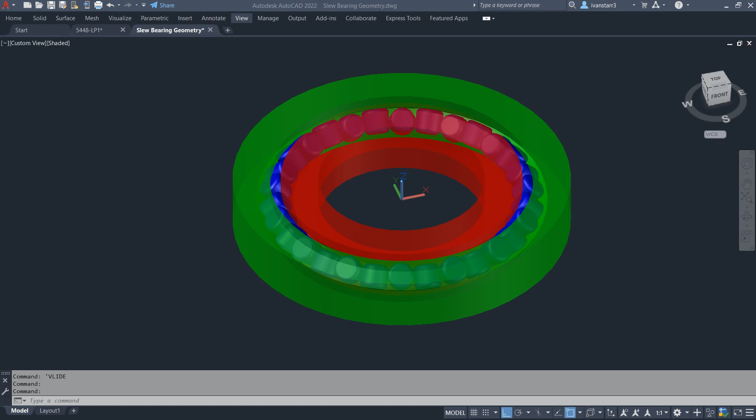Okay, this will be a brief description of slew bearing design in a program I wrote in AutoCAD to design slew bearings, which is a kind of bearing which can take a lot of axial force and a lot of bending moment instead of just a radial force.

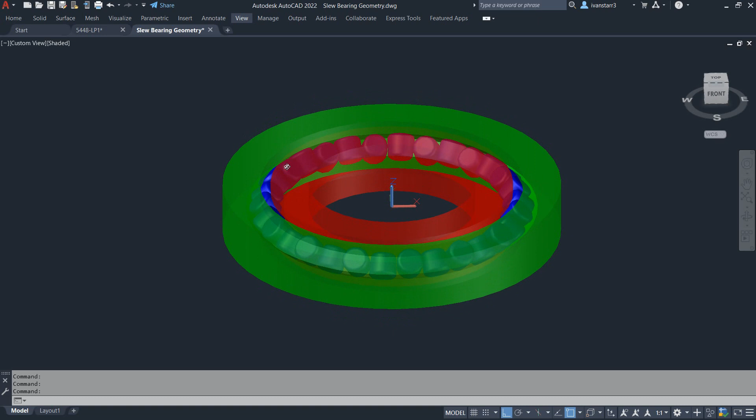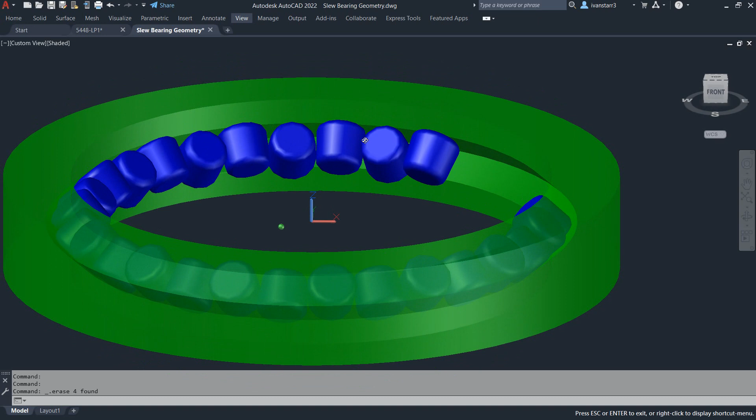And it's because they have these rollers in two V-shaped troughs. For example, if I erase these two things here, you can see that V-shaped trough, and that allows the bearing to support a lot of bending moment and a lot of axial force. And they're used in things like excavators and wind turbines.

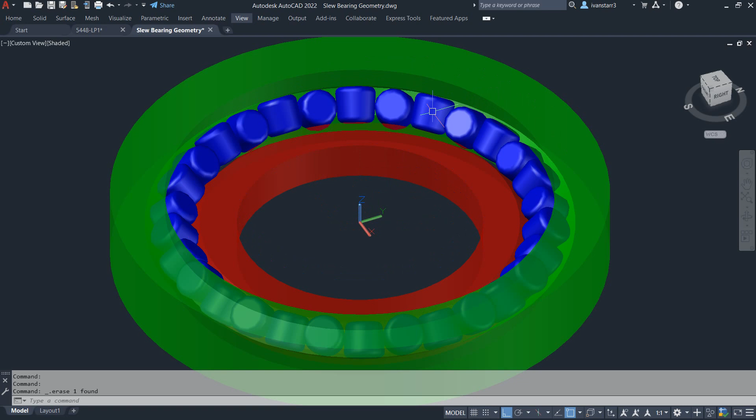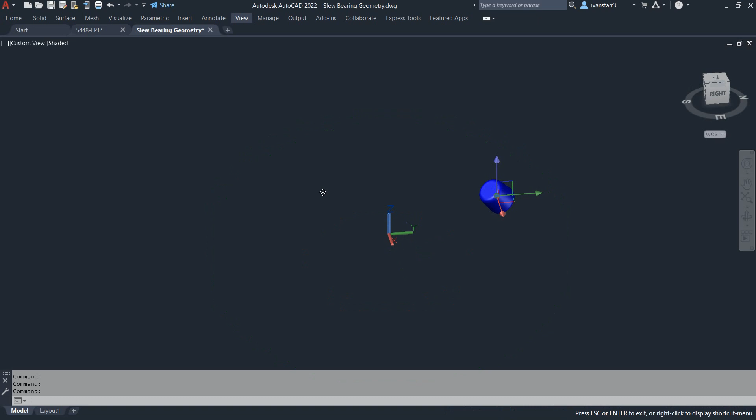And I became interested in them after I saw a video about a guy who was designing them for 3D printers. And he was doing it with cylindrical rollers, and it was only at the end he said, well, they should be cones. And so I said, well, damn, I'm going to design it with cones, because it was obvious that you shouldn't use cylinders. So I went about to write a program.

Well, first I designed my own slew bearing manually. I was able to do it, and then I wrote a program to do it. So the first thing I did is that I did it.

Whoa, hello, where'd everybody go? Oh, hold on, I want to have them.

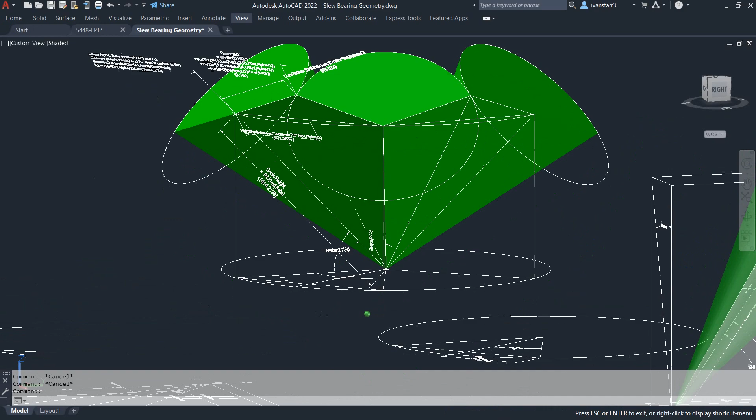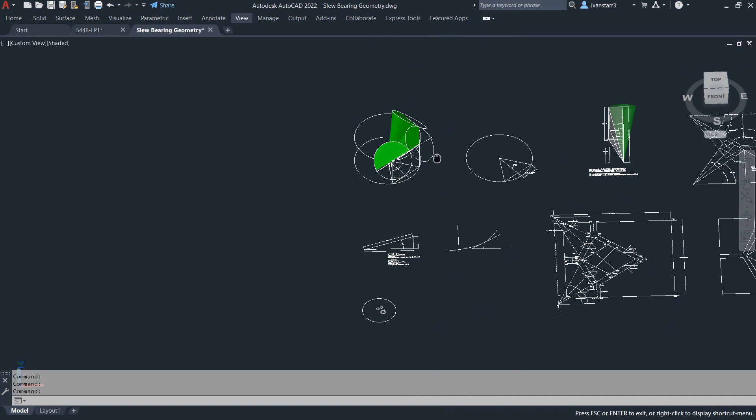First thing I did is I made a model of the bearing, of how it actually works, and they're cones because all the cones have to meet right at the center of the bearing. Well, at the bottom, along the radial axis of the bearing. And in order to get a slew bearing that will resist force in both directions, you have to have cones which point in both directions, as seen in here.

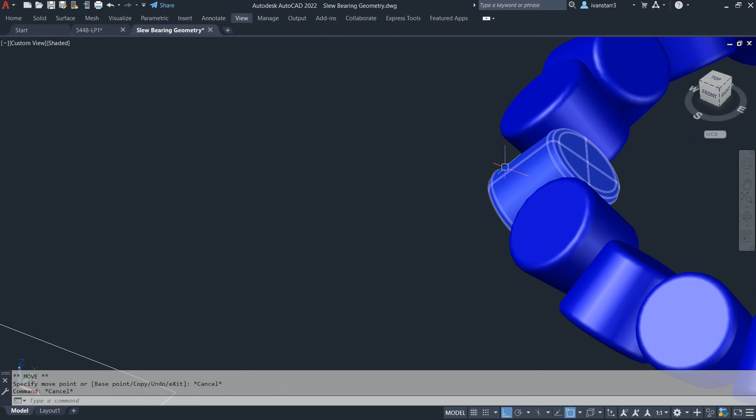So some of them will roll when there's a bending moment or a radial force in one direction, and then the other ones will work when there's a bending moment or a radial force in the other direction. So I realized that I was making things a little too complicated. I could actually describe everything with this here.

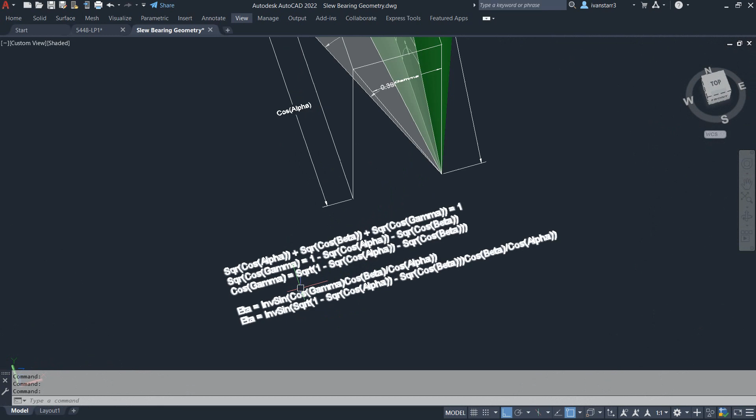And what I learned from this are the relations between these three angles. Alpha is determined solely by the number of rollers that you have in the bearing. And then there's these other two angles, which are beta, and another one I called eta.

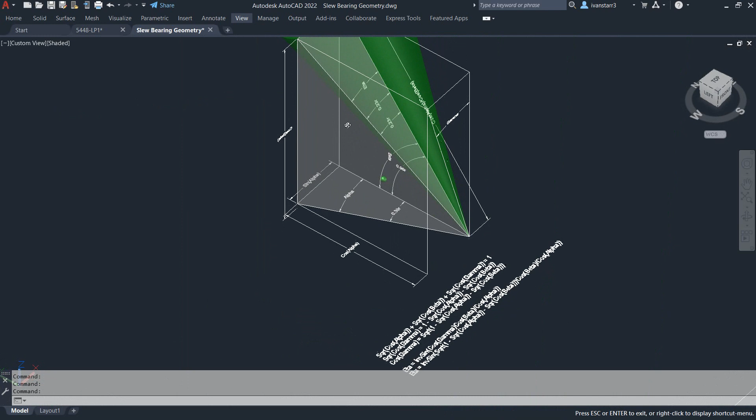And those are actually determined by the fact that the angles have to be correct for both sets of these bearings, one set pointing one way and the other set pointing the other, alternating. They have to line up correctly, and so this describes the geometry to have them lined up correctly.

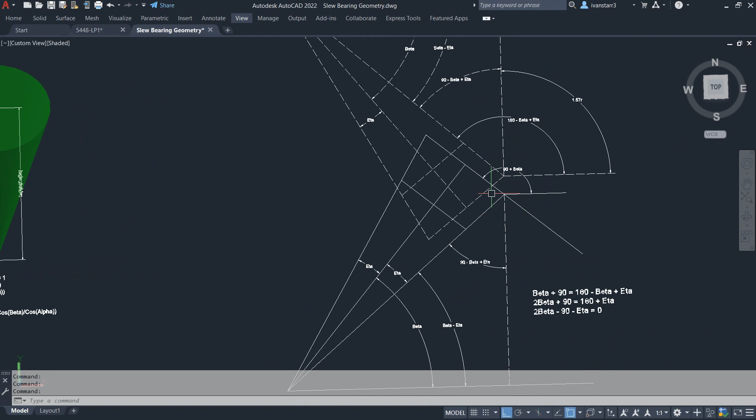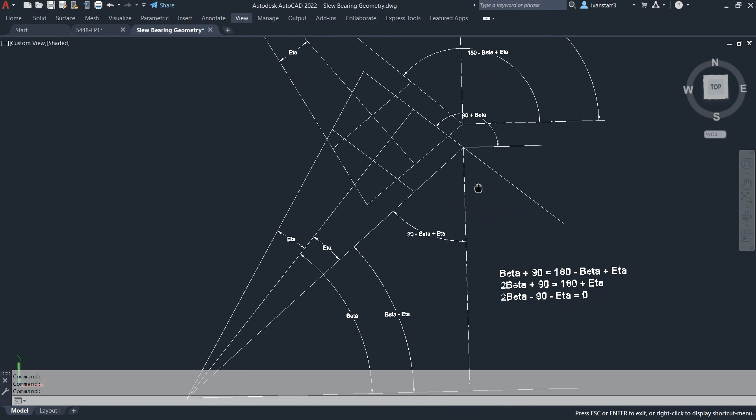And you get to a formula which basically says that beta plus 90 has to equal 180 minus beta plus eta in order for these angles to be equal, which they have to be for both sets of conic bearings to work in the same space. And that's simplified to 2 beta minus 90 minus eta equals 0.

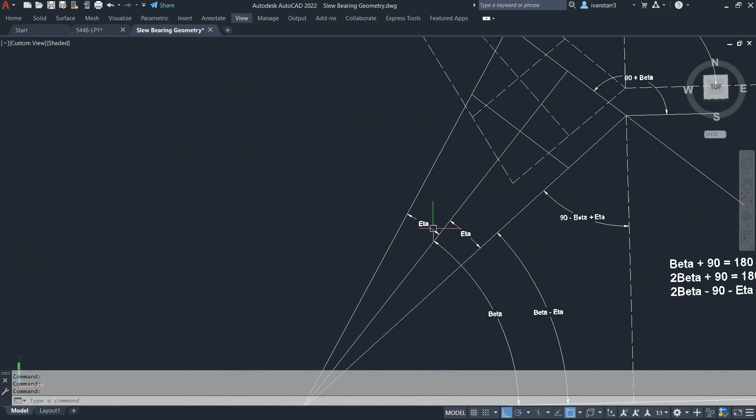But eta is dependent upon beta and alpha. Alpha stays constant because that's determined by the number of bearings. But eta is dependent upon beta, because when the angle beta changes, the angle eta changes as well. So I solved for eta.

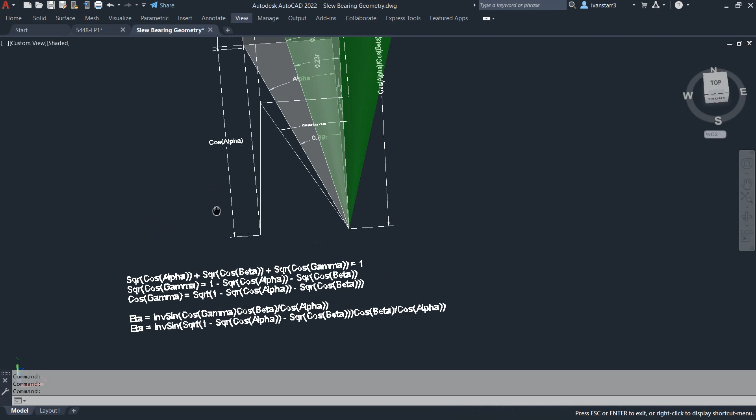Eta can be solved explicitly for alpha and beta. So I take that explicit equation for eta, and I substituted it into this equation, and I got a non-linear equation which I then used in the Newton-Raphson method for root finding, which is the simplest one that you can use, and it works very well if you know approximately where the root is, which we do. And don't worry about that, that's something else.

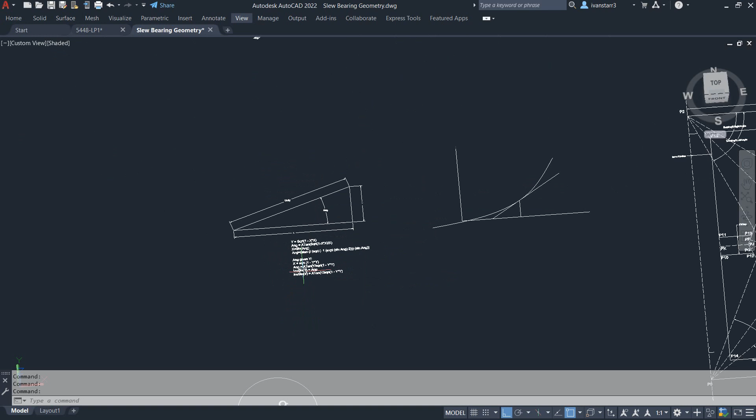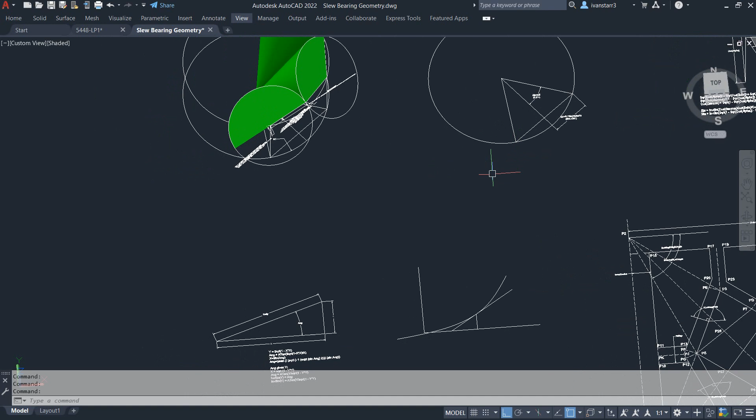In any case, once I have alpha, which is determined by the number of bearings, I can then use these equations here with the Newton-Raphson method in order to find the solution to beta and eta as well.

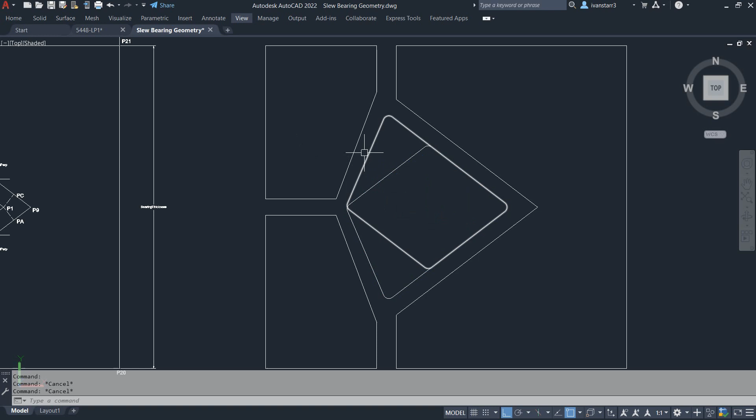And once I know beta and eta, then I can figure out these vector points right here, which will allow me to draw the forms I need in order to revolve into these shapes of the bearings and the races. And so I wrote it in AutoLisp, and this is the program right here.

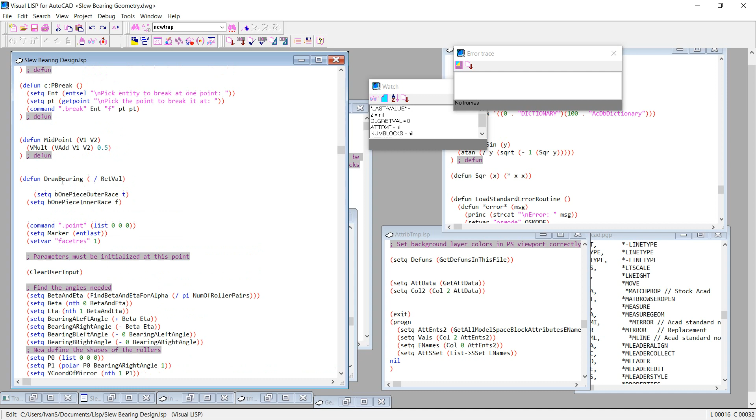In any case, here I'll show you the program now. So basically, go towards the origin of a blank drawing, and then you type bearing dialog. And right now, for example, this bearing has 30 rollers. I'll put that up to 60. Let's double it. Let's go crazy and see what happens. We'll draw it.

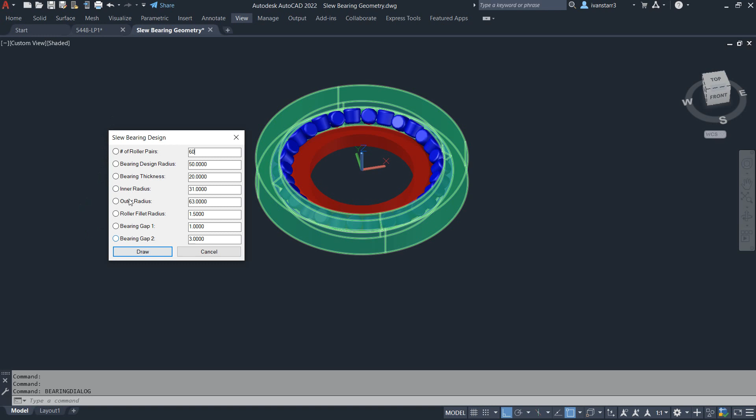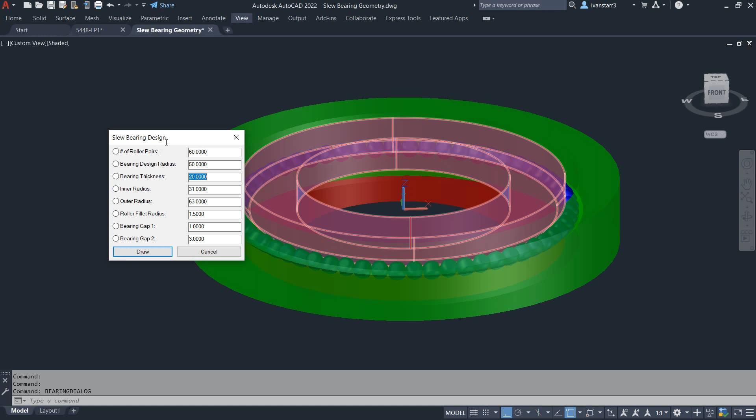And sure enough, look at that. Now we've got 60 bearings, but now look, the width is too great. So let's change the width. Okay, where's the width? Where the hell did it go? There it is, thickness. I'll say that could go down to 12 maybe. Alright, that looks a little bit better.

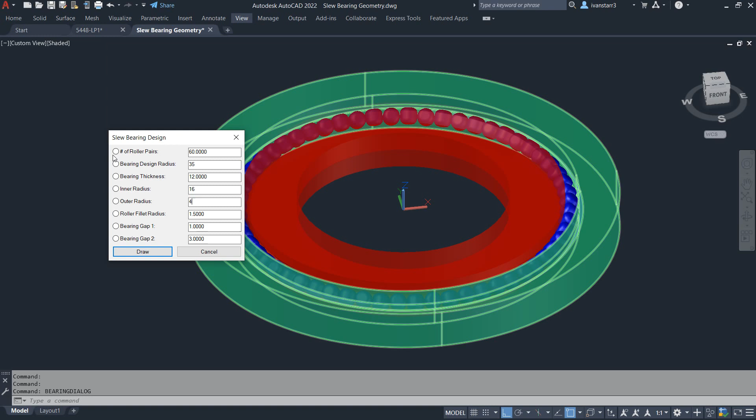And now maybe we want to make it a little bit smaller. So let's bring all the radii down. Let's see, the bearing design radius, let's take that down by 15, so that'll be 35. And then we have to have the inner radius go down by 15, so that'll be 16. And the outer radius by 15, and that will be 48. And then we'll draw it.

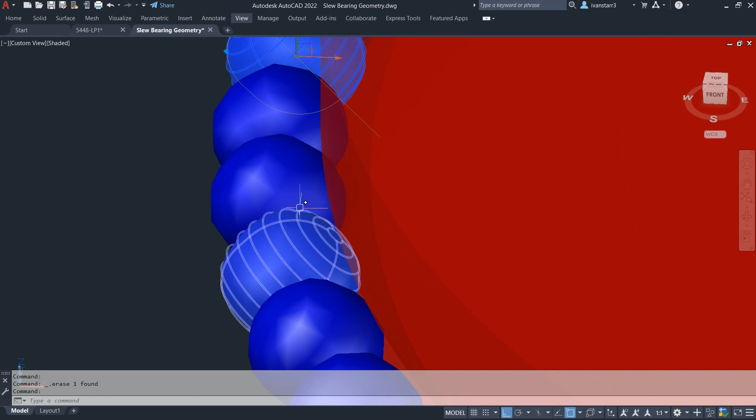And sure enough, yeah, that did it. And as you can see, the parts should all be ready to print. See, they're almost round. That's because I scaled it down, but I didn't change the fillet radius.

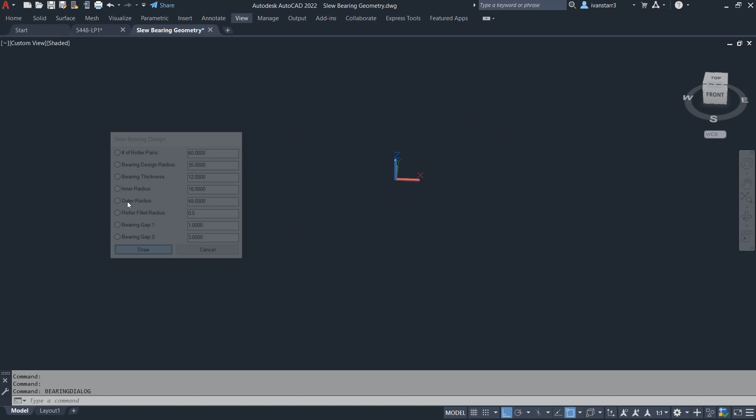So I'll go back, and I'll just change the fillet. Where's the fillet radius? There it is. Let's take that down to 0.5. Draw. Yeah, that looks a lot nicer. And so that's how you can use my program to design your own bearings.

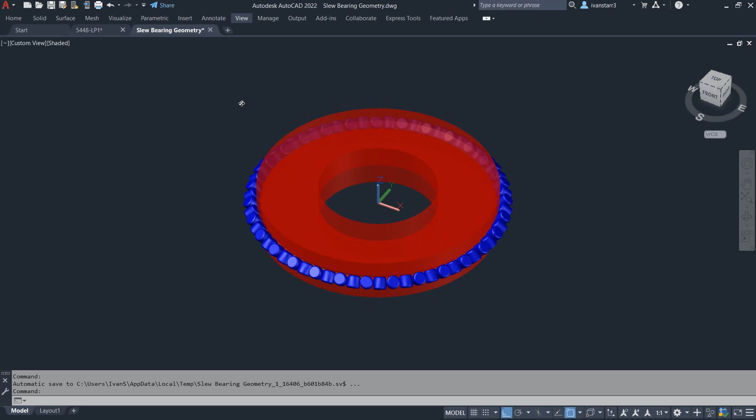I printed out a whole bunch of bearings. They work very nicely.